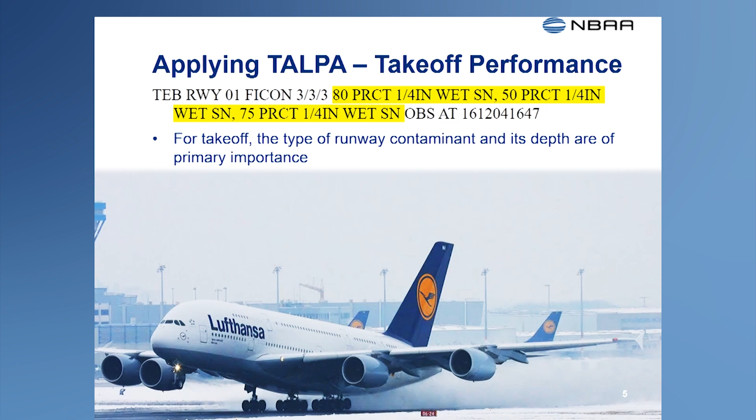And while it is not used with the takeoff performance data, the runway condition code can alert you to a runway that's not dry. When the runway condition code is less than 6, the runway's condition might warrant a closer look at your aircraft's takeoff performance.

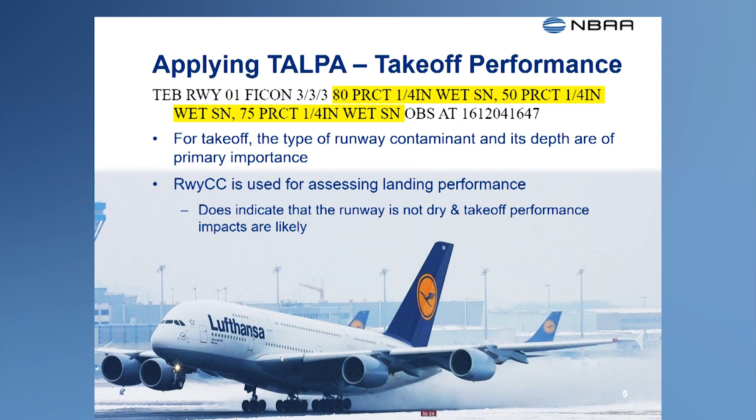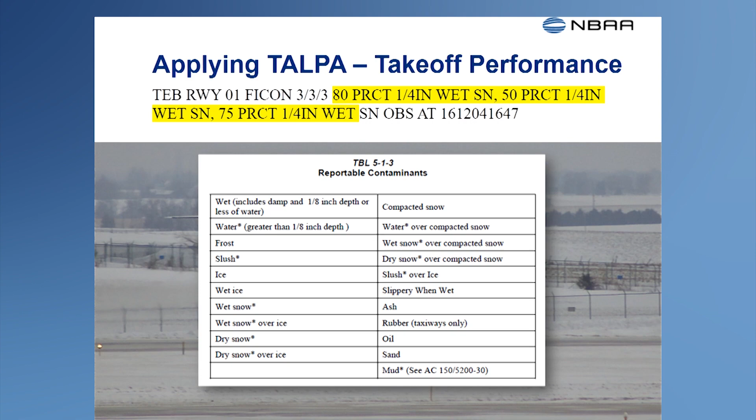One of the most significant improvements resulting from the TALPA initiative is aligning the terms used by the FAA to report runway contamination with the terms used in calculating airplane performance on a contaminated runway. Not all reportable contaminants will have corresponding performance data, but where that data is provided, you should find the terms used in the runway field condition reports closely match the terms used with the airplane's performance data.

Pilots should find it easier to use existing contaminated runway takeoff performance data with the new field condition NOTAMs, and this process should become even easier as manufacturers adopt FAA's latest guidance for developing contaminated runway takeoff data.

Among the TALPA initiative's biggest benefits are the tools pilots can use to assess landing performance based on the actual runway conditions at the time of arrival.

Before takeoff, certificated operators have to assess the runways of intended use at the destination airport and the alternate if one is required. If you can't meet those requirements on a given runway, then you have to reduce your takeoff weight or, in some cases, designate an alternate airport.

You must also be conservative in assessing conditions at your destination airport when the runway you plan to use might be wet. These requirements limit the takeoff weight and provide you with some degree of assurance that your airplane can safely land at the end of your trip.

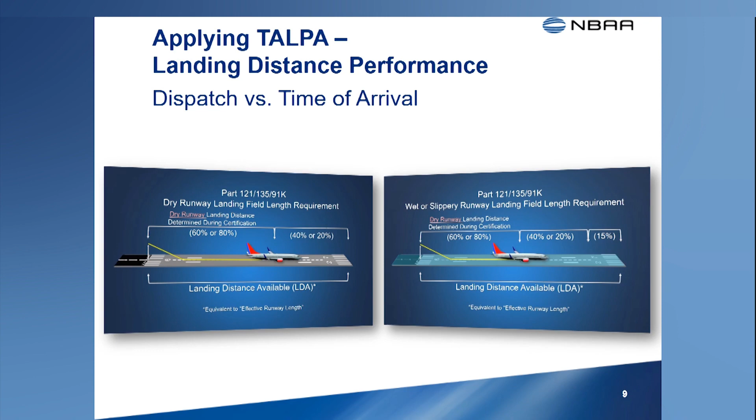However, when the runway is contaminated with water, snow, slush, ice, or a combination of these contaminants, this pre-takeoff assessment might not be enough to ensure a safe landing upon arrival.

While you are en route, the weather and runway conditions may have changed. It's important that pilots conduct a landing distance assessment after getting the latest weather and field condition reports, preferably before the top of descent, so you can include this information in your approach briefing.

While not required by the regulations, the FAA highly encourages operators to assess landing distance requirements at the time of arrival based on the reported or anticipated runway surface conditions. This is particularly important when the landing runway is contaminated or when it's not the same runway used for dispatch calculations.

To be effective, the landing distance assessment should account for the relevant conditions you expect at the time of arrival, such as landing runway, including headwind or tailwind component and runway slope, the runway surface condition, including field condition NOTAMs and the runway condition code, the weather conditions, type of precipitation at the field, and the forecast weather trends, the airplane's weight and configuration for landing, including the landing flap settings and the auto brake settings to be used, and the types of ground deceleration devices that will be used during the landing rollout, such as thrust reversers.

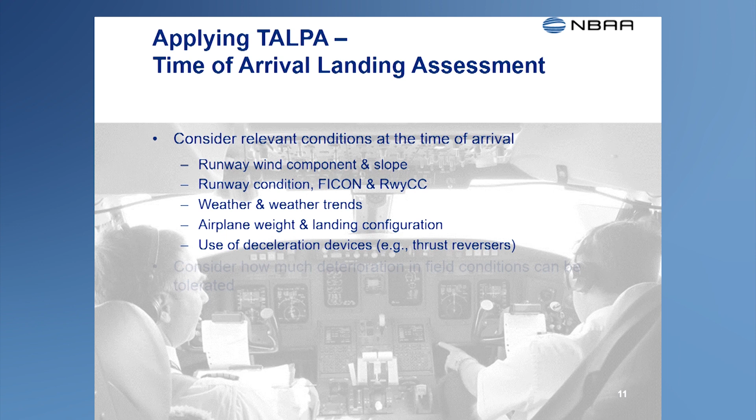When making the assessment, you should consider how much deterioration in the runway's condition you'll tolerate before deciding it's no longer suitable for landing. You can choose another runway at the same airport, or decide to divert to another airport. In other words, plan ahead. Establish bottom lines in terms of runway condition codes or pilot braking action reports, below which a landing on that runway is no longer safe. That kind of advanced planning gives you the information you need to make a quick decision to continue or divert.

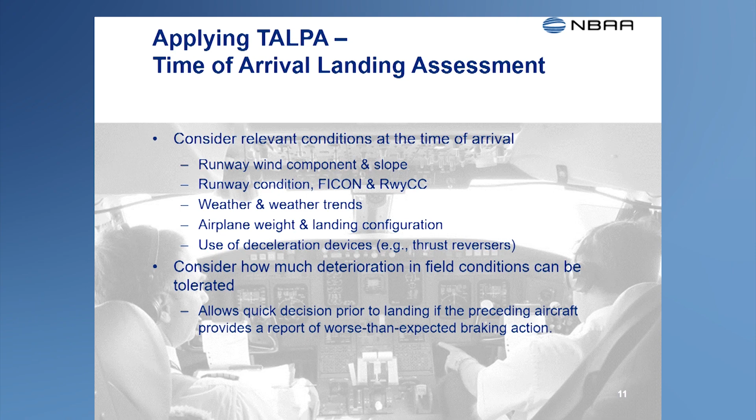The pilot's runway condition assessment matrix will help you make your landing distance assessment. The matrix describes the runway conditions associated with each runway code and pilot braking action. It also describes the expected airplane deceleration and controllability for each code or braking action. This helps pilots apply their previous experience with stopping the aircraft under the same reported conditions.

Pilots can use the matrix to compare the runway codes against the braking action reported by other pilots who've just landed. This can provide confidence that runway conditions remain acceptable or alert you that the runway conditions are deteriorating. When runway conditions deteriorate, pilot braking action reports help you evaluate how bad the runway's condition is, providing you with a better idea of the stopping performance you can expect on that runway and whether it remains acceptable for landing.

This is important. Exercise caution when basing a landing distance assessment only on pilot braking action reports, especially when the braking action shows improvement over the reported runway code. Using a better braking action report for your assessment may be appropriate when weather conditions are improving. But if the weather's not improving and you expect precipitation to continue, it may be safer to use the reported runway condition code for the landing assessment.

You should also evaluate the landing distance you'll need in case another pilot reports braking action lower than what you've anticipated given the reported runway condition code. One more thing: don't use the matrix to adjust the runway condition code based on the contaminants reported in the field condition NOTAM. Based on their observations, or with evidence from high or low friction measurement readings, the airport operator may upgrade or downgrade the runway code reported in the NOTAM.

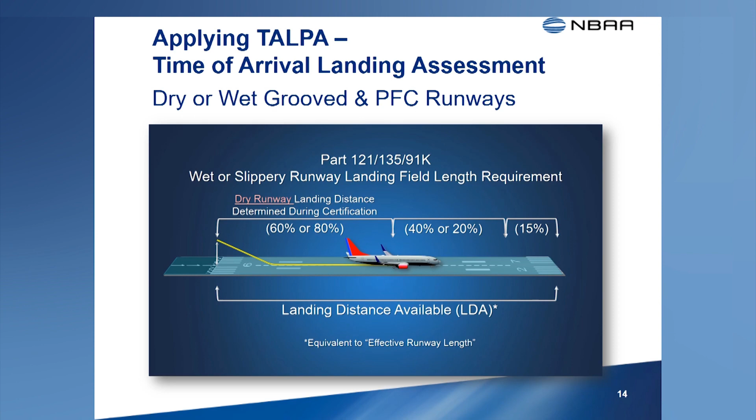A runway contaminated with water, snow, slush, ice, or a combination of these elements presents a greater challenge when stopping the airplane. The landing margins provided by the dispatch rules we just talked about have proven inadequate when landing on runways contaminated with any of these elements.

Therefore, the FAA recommends you make your assessment using performance data that's based on or at least consistent with recommendations in the new TALPA Advisory Circular on landing performance data for time of arrival landing performance assessments. It's easier for you to make this assessment using data based on FAA's latest guidance because the landing distances provided are based on the reported runway condition codes or pilot braking action.

The FAA recommends that the landing distance data used for this assessment also include an adequate safety margin, which the agency considers to be at least 15%. However, some manufacturers believe the amount of safety margin applied should be left to the discretion of the operator and don't include a safety margin with this data.

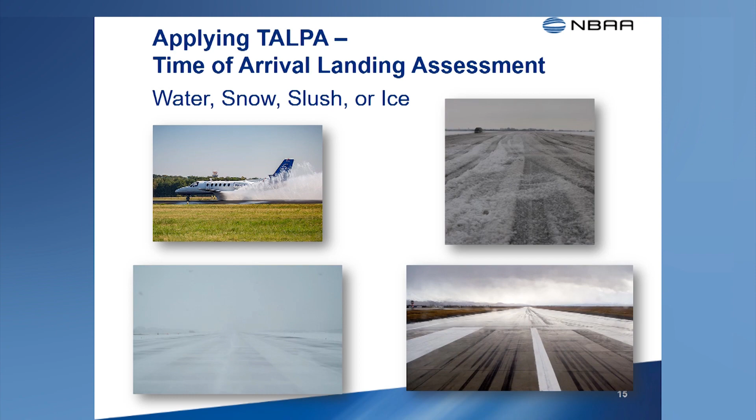When the landing data follows FAA's latest guidance, you can determine the landing distance required based on either the reported runway condition code or the reported braking action. You can also determine the minimum acceptable runway condition code or braking action for landing early enough so that if these conditions deteriorate, you can request a different landing runway or divert to a more suitable airport.

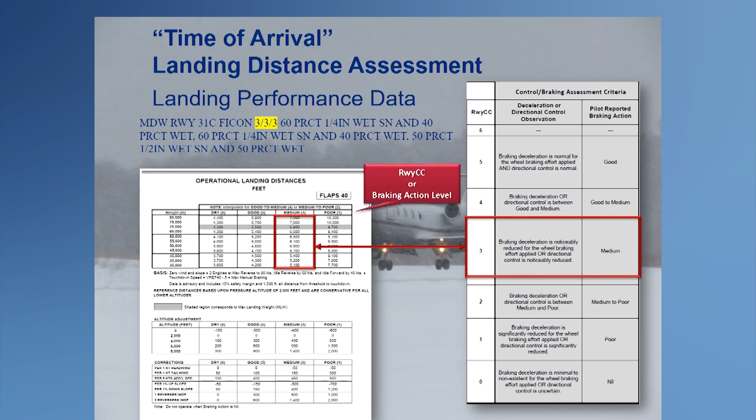Not all airplanes have landing performance data based on the FAA's latest guidance. For those airplanes, the FAA has provided a table of landing distance factors for the reported runway condition codes and pilot braking action levels. This table is used with the unfactored dry runway landing distances published in the Airplane Flight Manual. It includes the FAA's recommended 15% safety margin, along with an air distance representative of normal operating practices.

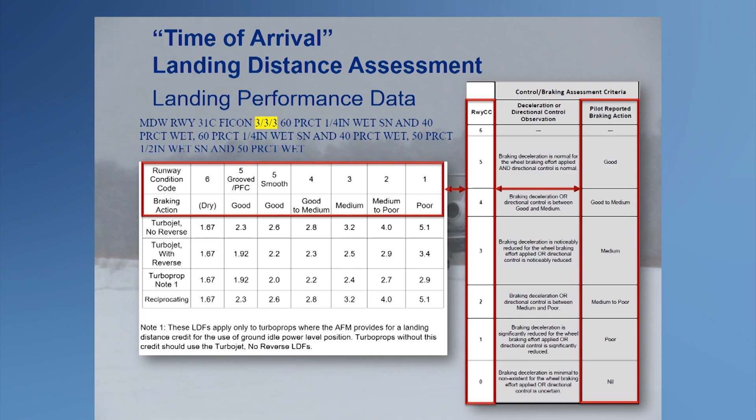To find the landing distance required, multiply the dry runway unfactored landing distance by the number associated with the reported runway condition code or braking action. Different factors are provided for turbojet airplanes, turboprop airplanes, and reciprocating engine airplanes.

For turbojet airplanes, the factors vary depending on whether thrust reversers are used during the landing. Factors are also provided for turboprop airplanes that can take a landing distance credit for ground idle reverse. If that credit is not allowed by the AFM, pilots of these airplanes should use the turbojet factors associated with no reverser use.

Now that we know the landing distance required, we need to check whether the runway is long enough for our use. In this example, our arrival airport is Chicago Midway. The landing runway is 31 Center. We can determine the length of the runway available for landing by looking at the Midway entry in FAA's chart supplement, or we can look on the additional runway description section of the Jeppesen Airport chart.

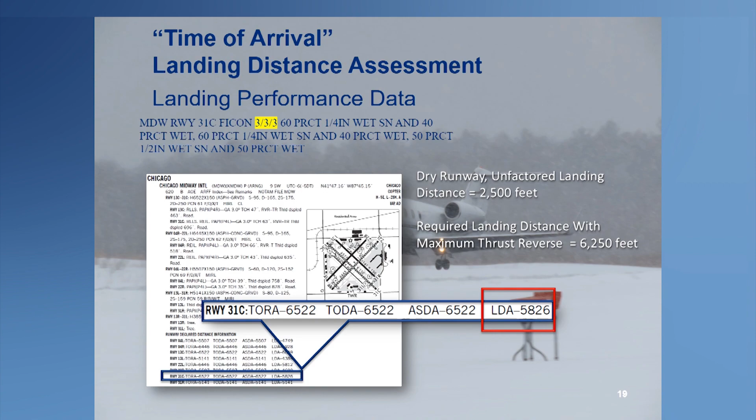Referring to the chart supplement entry for runway 31 Center, we see the landing distance available, the LDA, is 5,826 feet. With the airport reporting a runway condition code of 3 for this runway, we'll need at least 6,250 feet to land. This runway is not long enough for landing given the reported runway conditions.

The shortest runway of these two is 9 left, which has an LDA of 7,500 feet. This runway is acceptable for the reported codes. 10 center would be acceptable as well.

Even if we determine that a runway is long enough for the reported code, we should consider the possibility that conditions might get worse before we land. This is where we can draw our bottom line based on the lowest condition code or braking action level where landing becomes unacceptable.

Should the runway condition code deteriorate to 2, or should pilots report braking action as medium to poor, our landing distance factor increases to 2.9 and our landing distance increases to 7,250 feet. This is still less than the LDA for runway 9 left.

However, if the code decreases to 1 or the braking action deteriorates to poor on this runway, the landing distance factor increases to 3.4. The landing distance required increases to 8,500 feet, which is far more than the LDA for 9 left. If an aircraft with similar performance to ours reports a braking action of poor, we need to request a different runway at O'Hare.

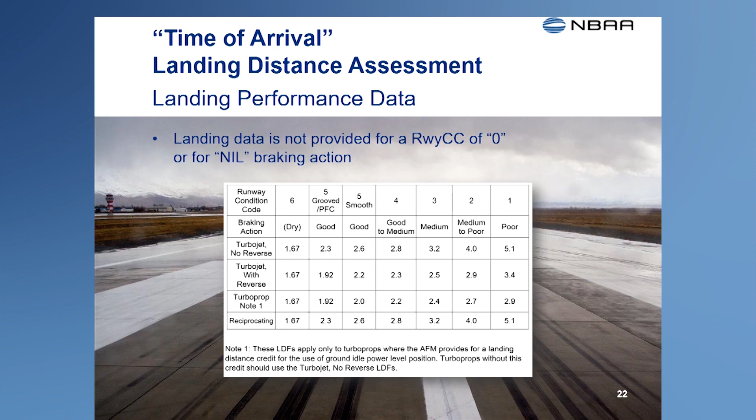No data is provided for nil braking conditions or for a runway condition code of 0. That's because these runways should be closed until their condition is improved. ATC will also cease operations to a runway with braking action reported as nil.

Many manufacturers currently provide advisory performance data for takeoff and landing on a contaminated runway. This advisory data may be used for your time of arrival landing distance assessment, provided it accounts for the surface conditions described in the Runway Condition Assessment Matrix, along with a few additional considerations expected by the FAA. While this advisory data may have been constructed using industry best practices at the time, it may not consider the many variables affecting normal landing operations.

For example, this data may apply algorithms to the dry runway landing distance data determined during certification for various contamination types. As a result, this advisory data may not meet all the requirements desired for landing distance data intended for the time of arrival assessment. Your airplane's manufacturer may be able to guide you in the appropriate use of this advisory data when performing a time of arrival landing assessment.

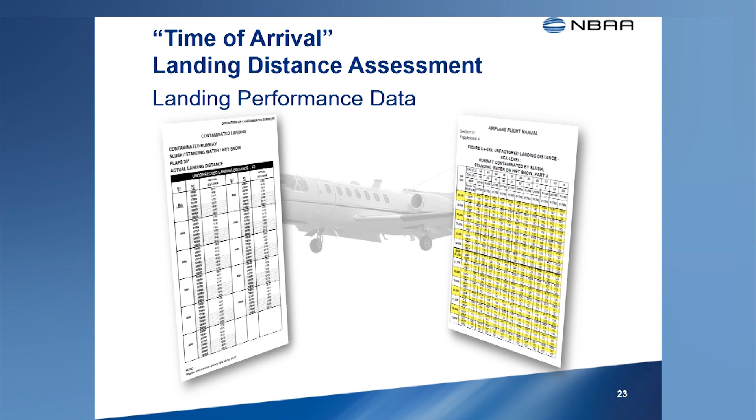Remember, the landing assessment process continues until the aircraft is safely on the ground. Be ready for any deterioration in runway conditions and braking action, and have a plan ready in case those conditions become worse. What you just saw is a representation of how the Runway Condition Assessment Matrix, together with the new runway condition codes and pilot braking action terms, are used with the airplane's performance data to help you make a well-reasoned assessment of your airplane's ability to safely take off or land.

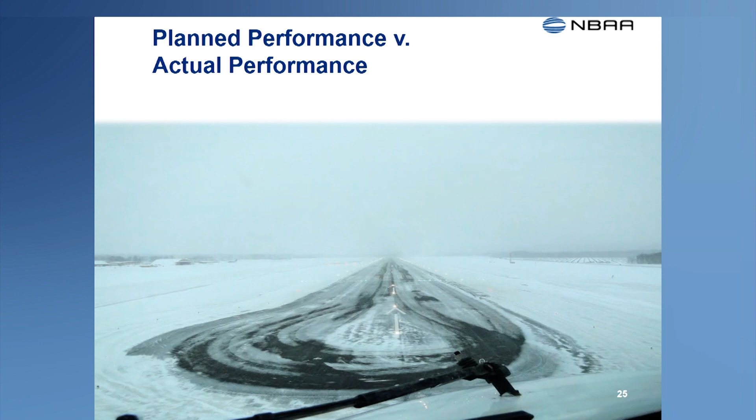The time of arrival assessment gives you a good idea of the airplane's ability to stop given the reported condition or braking action. You, the pilot, are still responsible for making a safe landing. That safe landing involves performing the landing maneuver using the same procedures as those used to develop the operational landing distance data. Excessive speed crossing the threshold, extending the landing flare to achieve a smooth touchdown, delayed application of spoilers or thrust reversers, or delayed application of manual braking all extend the air distance to touchdown or the distance required to bring the airplane to a stop.

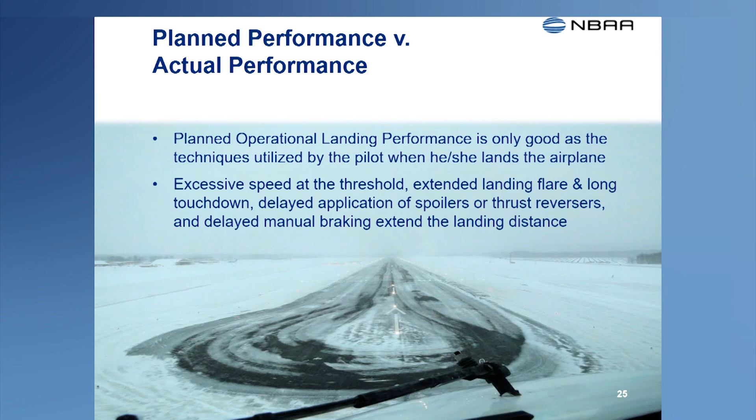If the landing assessment is based on using maximum reverse thrust, but you only use idle reverse, then the stopping distance could be much longer than planned, especially with lower runway condition codes or reduced braking action. If you're going too fast over the threshold, or if you can't make the assumed touchdown point, your best option may be to go around and try again.

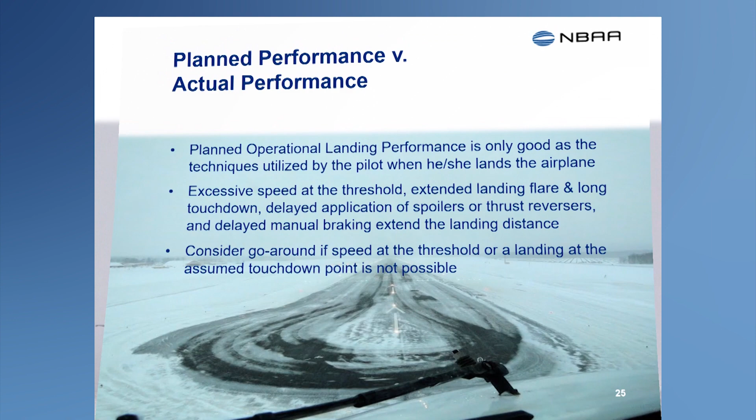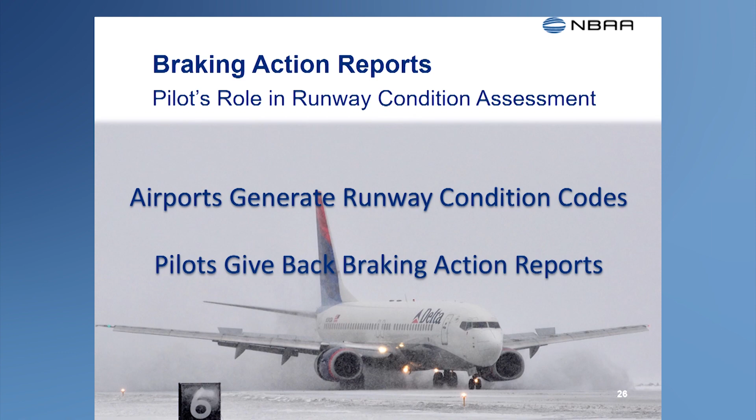The pilot's role in TALPA doesn't end when the airplane exits the runway. While the airport operator is responsible for assessing the runway's condition, pilots are responsible for providing accurate braking action reports that help validate the runway's condition. These reports provide critical feedback about the accuracy of the assigned codes when it comes to actual braking performance.

These reports are passed along to other pilots landing at the airport and to the airport operator. To the landing pilot, they can provide a degree of confidence about their own runway assessment, or these reports can serve as a warning that the runway's condition is getting worse.

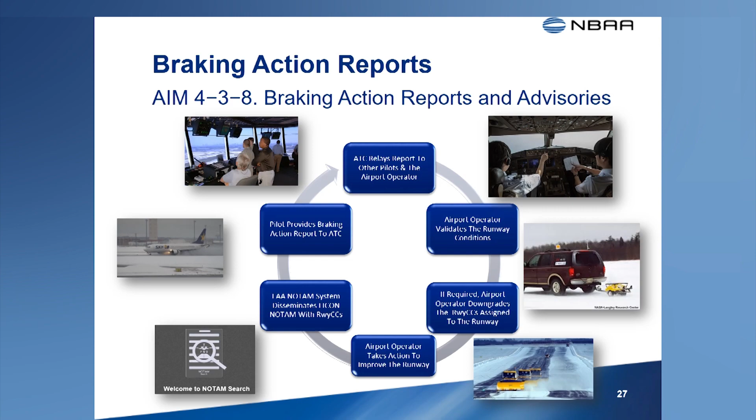Of course, when the runway is busy, it's harder to make those critical inspections. In fact, the airport operator may have to schedule them between arrivals. For that reason, airport operators rely on braking action reports to confirm the runway's condition is not deteriorating and that the reported runway code remains valid. However, when braking action reports suggest the reported codes no longer match the runway's true condition, the airport operator may downgrade the codes until the runway's condition can be improved.

FAA's new braking action terms now closely associate stopping performance and controllability with the runway's contaminants and condition codes. Whenever ATC reports braking action advisories are in effect, pilots should provide a braking action report. This is especially important when your braking experience is different than what you expected, given the reported runway condition code.

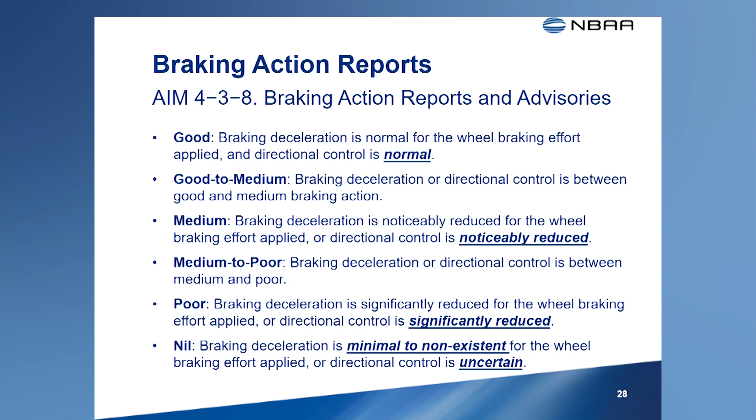The good news is that these new terms are included in the pilot's version of the Runway Condition Assessment Matrix. When it's safe and appropriate to do so, you can refer to this matrix to help describe the airplane's deceleration and directional control during your landing. We want to emphasize: when it's safe and appropriate to do so.

Don't jeopardize aircraft control or safety during taxi to make the report. Give your braking action report only when it's safe for you to do so.

Another important thing: you should correctly judge the airplane's deceleration relative to the amount of wheel braking used during the stop. Some airplanes can be slowed using highly effective thrust reversers. You might hardly touch the wheel brakes until you reach taxi speeds. And while the overall stopping performance of your airplane might appear to be good using thrust reversers alone, that doesn't equal good wheel braking action.

You might not achieve the same deceleration using wheel brakes alone, especially when runway contaminants don't impinge against the fuselage and wings. As a pilot, you must be familiar with your airplane and know the amount of deceleration provided for the wheel brakes applied when stopping on a dry runway. This allows you to accurately judge the reduced deceleration when stopping on a contaminated runway, when the wheel brakes are not as effective as they are on a dry runway.

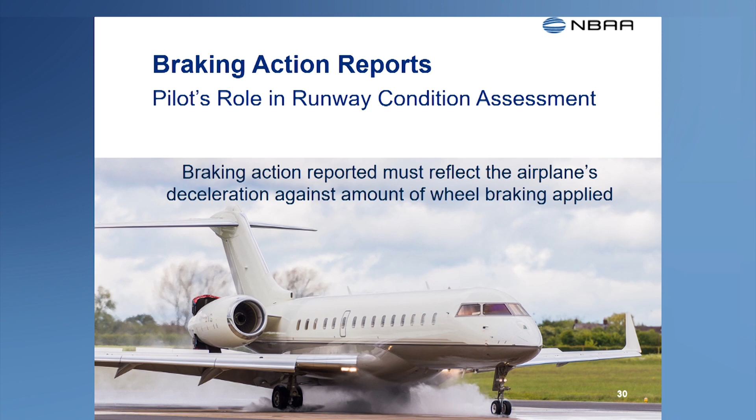Have a good idea of what normal deceleration feels like in your airplane when stopping on a dry runway. Judge your deceleration when stopping on a contaminated runway based on the amount of wheel brakes applied. Then, use the observed level of deceleration along with the RCAM to make an accurate braking action report.

Before we close, let's talk about situations where the airplane doesn't behave as planned. A landing under these circumstances might involve emergency or abnormal procedures. There are times when the pilot needs to know the actual landing distance required in an abnormal landing configuration.

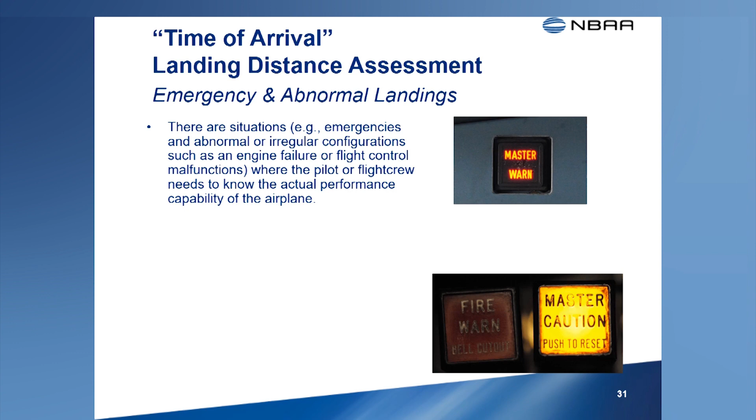The airplane's emergency or abnormal checklist may provide correction factors to the airplane's dry runway unfactored landing distance to address these configurations. Depending on the situation, the pilot in command may decide that it's safer to land immediately without any added safety margins, rather than staying in the air to burn off fuel, reduce landing weight, and shorten the landing distance required. The recommendation for a time of arrival landing assessment is not meant to influence the pilot in command's decision to land when the situation warrants using the actual landing distance without safety margins.

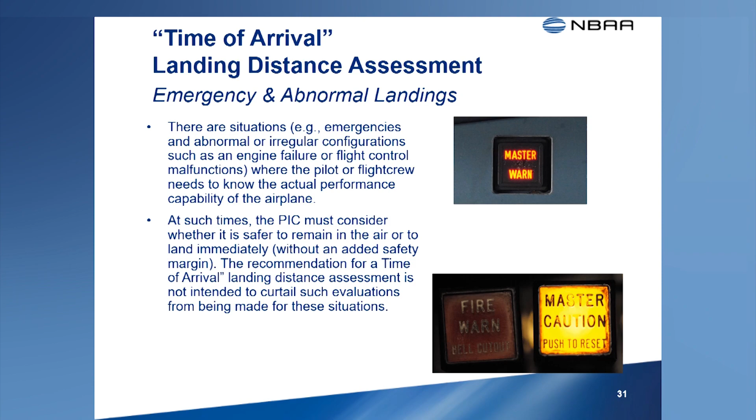In this briefing, we've seen how the new field condition NOTAMs and runway condition codes are used during takeoff and landing performance planning. The type of contamination reported, along with its depth, can help you determine your takeoff performance when the runway is contaminated. The new field condition NOTAMs should closely match the contaminated runway takeoff data provided for your airplane.

The runway condition codes and braking action reports help the pilot make a time of arrival landing performance assessment on a contaminated runway. For manufacturers who've elected to comply with the new TALPA guidance, landing distance data may be provided that directly refers to these codes and braking actions. For older airplanes without such data, you can multiply the dry runway unfactored landing distance found in your AFM by the FAA's landing distance factors for a given runway code or braking action.

The resulting landing distance required includes the FAA's recommended 15% safety margin and can help you decide whether the runway is long enough given the reported conditions or braking action.

Your landing assessment should establish the minimum acceptable runway condition code or braking action for the landing runway. If the condition code or braking action falls below this minimum, consider a different runway for landing, or diverting to an airport that offers better conditions.

This landing assessment is not a one-time check, but instead is an ongoing evaluation that continues until you're fully stopped. The runway assessment process depends on pilots furnishing accurate braking action reports.